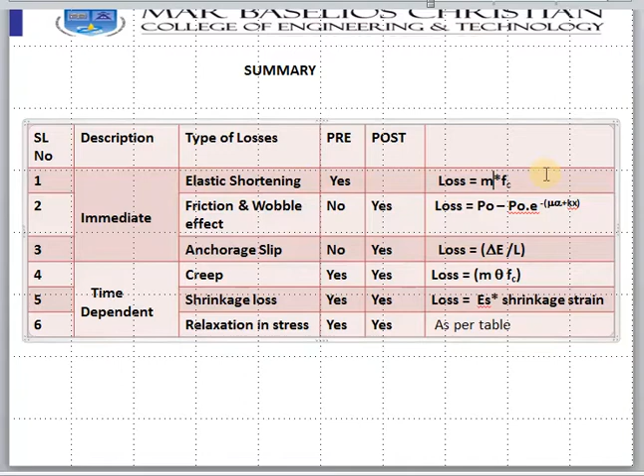Now we will be looking into another type of problem on elastic shortening, how to find out the loss in elastic shortening. Is that fine? So let us see. This is another problem. Let me read out the problem. A rectangular concrete beam 300 mm deep and 200 mm wide is pre-stressed by means of 15 5 mm dia wires located 65 mm from the bottom of the beam and 3 numbers of 5 mm wires located 25 mm from the top of the beam. If the wires are initially tensioned to a stress of 840 Newton per millimeter square, calculate the percentage loss of stress in steel immediately after the transfer, allowing for the loss of stress due to elastic deformation.

So we need to find out the loss of stress due to elastic deformation here. Let us see what data are given to you. A rectangular beam of 300 mm deep and 200 mm wide, so breadth is 200 and depth is 300. It is pre-stressed by means of 15 5 mm dia bars. So area of steel at bottom is 15 numbers of 5 mm dia, and at the top is 3 numbers of 5 mm dia. The location is given: the top one is located at 25 mm from the top, and the bottom 15 tendons are located at 65 mm from the bottom of the beam.

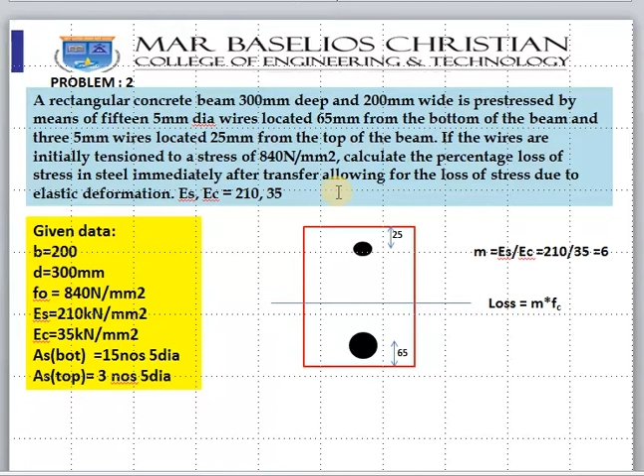Let us see how to find out the center of gravity. We have done a problem, if you remember, on I sections, wherein the tendons are distributed unevenly, and we found out the CG like that. We need to find it out. So before going to that, let us find out easily what other things are possible. We can find out the initial force. The stress is given to you, 840, so the force in the steel we can find out.

Yeah, because we need it for finding out the stresses. Yeah, P0. So stress force is nothing but stress into area. So stress is 840 given to you, and area is area of the tendons. So pi d square by 4, 15 numbers into pi d square by 4 plus 3 numbers into pi d square by 4, which will come around 296 kilonewton. That is the force, the initial pre-stressing force.

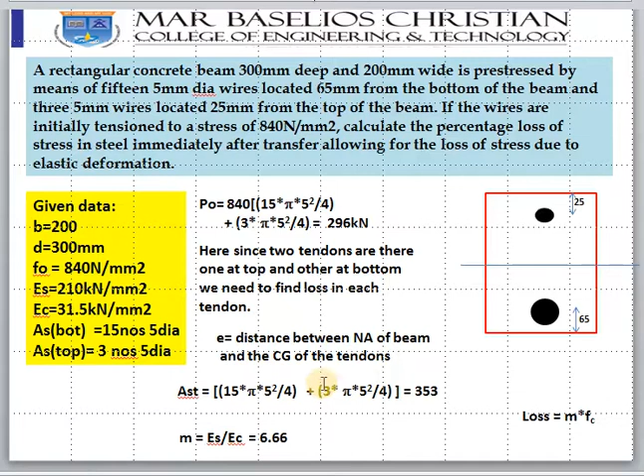So let us find out the area of steel also. So pi d square by 4, 15 numbers plus 3 numbers, into pi d square. So 15 at bottom, 3 at top. So total together it will come around 353. Yeah. Right. This comes around 6.66.

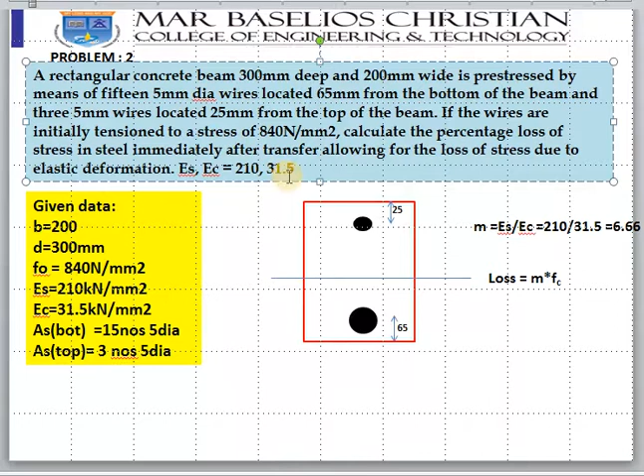EC is 31.5. Yeah, say 31.5. EC is 31.5. Okay, there was an error. 31.5. Okay, it's okay, no problem. It's only a typographical error. So we got m is equal to 6.66. So where are we now?

Let us find out the center of gravity of the tendons. How do you find out the center of gravity of the tendons? Same way, y bar. Let us say y bar is the distance from the bottom of the beam to the CG of the tendons. So y bar is equal to a1 y1 plus a2 y2 divided by a1 plus a2. y1 is from the CG of the first tendon to the bottom, that is 65, it is given to you, and y2 is from the CG of the second tendon to the bottom. So y2 we can find out.

Total is 300 minus 25, which will be 275, and the total area 353. So y bar is calculated to be 100 mm. So this is the eccentricity. You see, this is the neutral axis, and this red line is the CG of the tendon, and this distance is the eccentricity. So 150 minus 100 will give you 50, the eccentricity e.

Okay, so let us find out the stress in the concrete at the level of the top wire and the bottom wire also. Let us say y upper is the distance from the neutral axis to this point, which you will find out as 125, and from the neutral axis to the bottom, y lower, is 85.

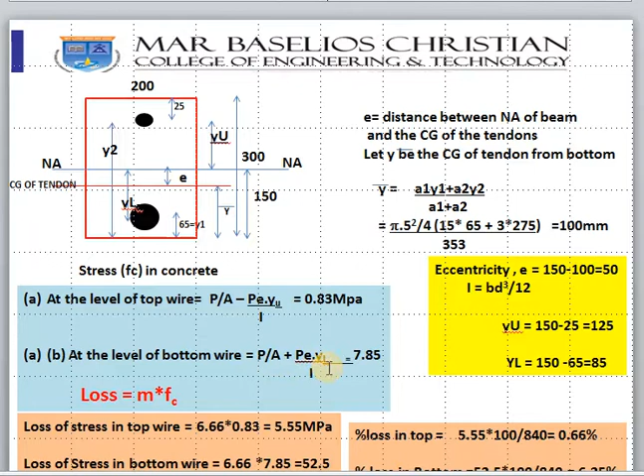At the level of the bottom wire, it is P by A plus. Why plus? Because it bends up, the eccentricity is at the bottom, so the bottom layer will be in compression. So plus Pe y lower divided by I, which is equal to 7.85. So this is the stress.

So once you got the stress, whatever you found out is fc, then loss of stress in the top fiber is m into fc. m you found out already, m is 6.66, so it will come around 5.55. Loss of stress in the bottom fiber is 6.66 into fc. fc here is 7.85.

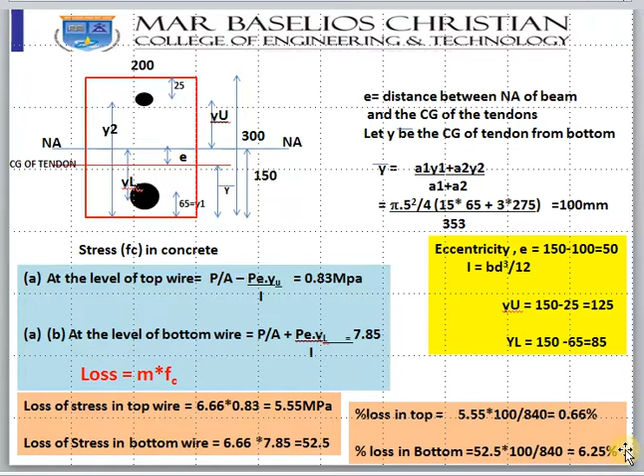Okay, so percentage loss in the top: the actual stress on the wire is 840. So percentage is 5.55 into 100 divided by 840, 0.66 percentage. Percentage loss in the bottom is 52.5 into 100 divided by 840, so it will come around 6.25 percentage. I hope this is clear.

The only thing here is we need to find out the y bar, and we need to find out the loss in stress separately for the upper wire and the lower wire. So Pe by Z, M by Z, Z we cannot use here, because we wanted to find out the stress at the level of the steel. So Pe into y upper by I, and here Pe into y lower by I. Please go through it, it will be clear.